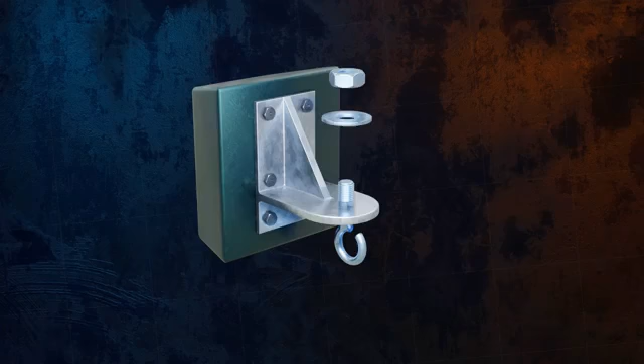We know that when we apply loads to an object, like this bracket, if we keep increasing the magnitude of the load, at some point the material will fail.

But how can we predict when static failure will occur? What level do the stresses in the object need to reach for it to fail?

First, we need to define what failure is. For ductile materials, failure is usually considered to occur at the onset of plastic deformation, and for brittle materials, it occurs at fracture. These points are easy to define for a uniaxial stress state, like a tensile test. They occur when the normal stress in the object reaches the yield strength of the material for ductile materials, and the ultimate strength for brittle materials.

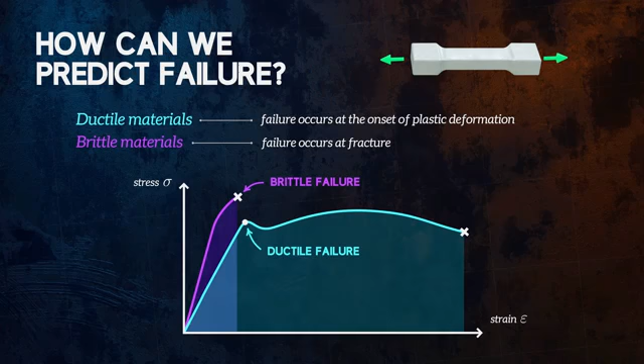But for a more complex case of triaxial stress, predicting failure is much less straightforward. In fact, it's so difficult to predict that we don't have one universally applicable method. Instead, we have to predict failure by selecting the most suitable one of a range of different failure theories, each of which we know works relatively well under certain circumstances, based on experimentation.

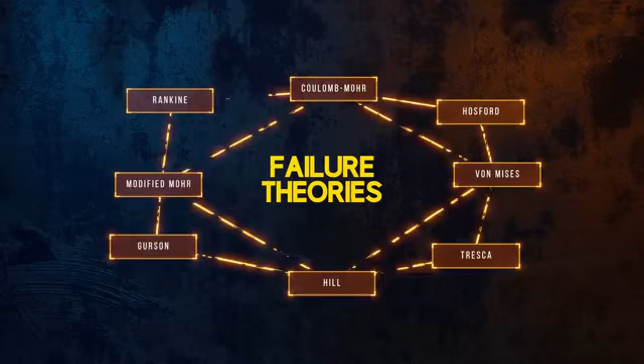Because they fail in fundamentally different ways, failure theories which apply for ductile materials usually aren't applicable for brittle materials, and vice versa. So what does a failure theory do?

It's quite simple. It allows us to predict failure of a material by comparing the stress state in the object we are assessing with material properties that are easy to determine, like the yield or ultimate strengths of the material that we can obtain by performing a uniaxial test.

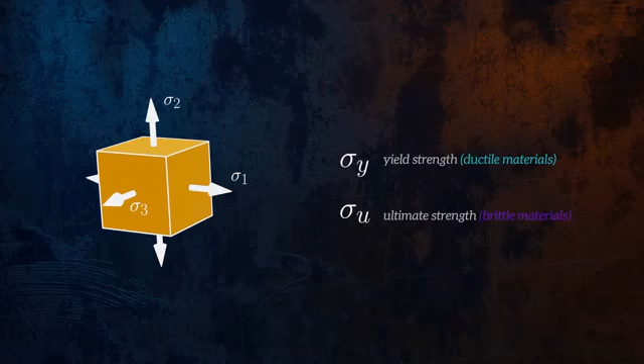The stress state at a point can be described using the three principal stresses. So most failure theories are defined as a function of the principal stresses and the material strength.

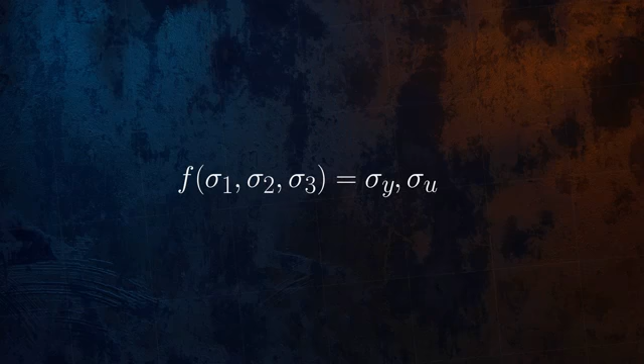Probably the simplest failure theory is to say that failure occurs when the maximum or minimum principal stresses reach the yield or ultimate strengths of the material. This is called maximum principal stress theory, or Rankine theory.

Although it's simple to apply, it's not actually a great failure theory, particularly for ductile materials, for reasons I'll explain later. Let's look at some better failure theories for ductile materials.

Any good failure theory needs to be consistent with experimental observations we can make about how materials fail. There is one key observation that failure theories for ductile materials need to capture, which is the fact that hydrostatic stresses do not cause yielding in ductile materials.

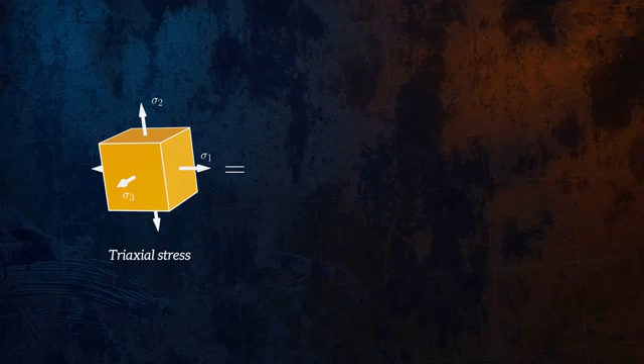Let me explain. A general triaxial stress state, like the one shown here, can be decomposed into stresses which cause a change in volume and stresses which cause shape distortion.

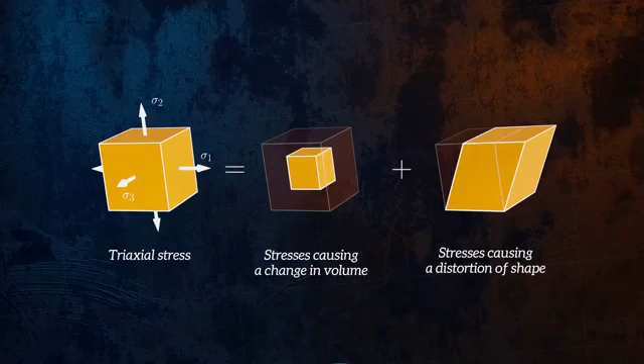Stresses that cause a change in volume are called hydrostatic stresses, because that is the type of stress acting on an object submerged in liquid.

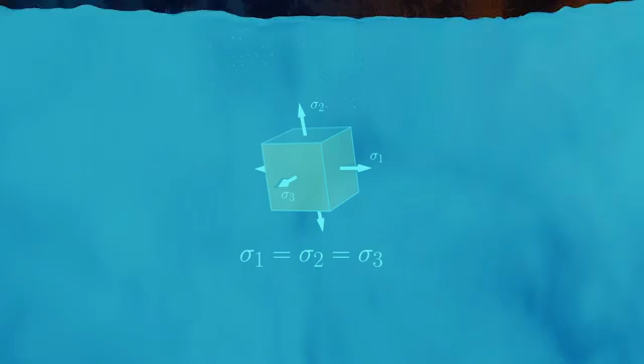For a hydrostatic stress configuration, the three principal stresses are always equal, and there are no shear stresses. For a triaxial stress state, we can calculate the hydrostatic component as the average of the three principal stresses.

The mechanism that causes yielding of ductile materials is shear deformation. Since there are no shear stresses for a state of hydrostatic stress, this component can be very large and still not contribute to yielding. Yielding is only caused by the stresses which cause shape distortion.

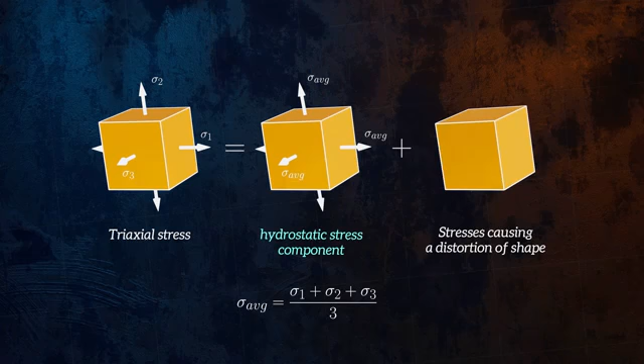These are called deviatoric stresses. The deviatoric component is calculated by subtracting the hydrostatic component from each of the principal stresses.

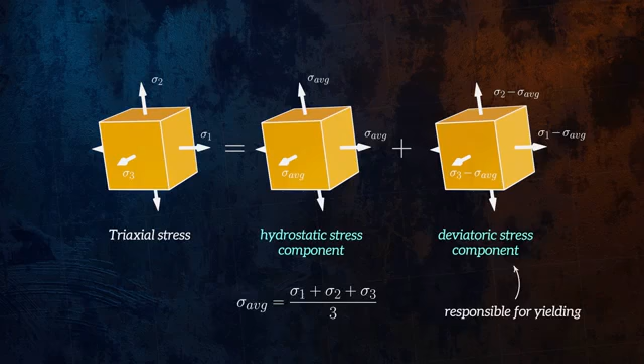The hydrostatic and deviatoric components can be expressed in matrix form, like this. Here we have described the stress state using the principal stresses, but we could also describe it for an arbitrary orientation of the stress element.

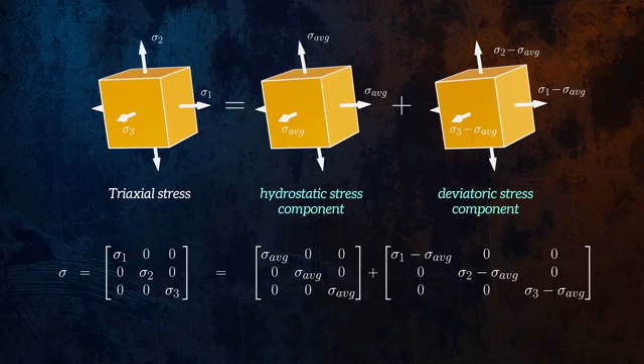It can be helpful to use Mohr's circle to understand the hydrostatic and deviatoric components of a triaxial stress state. For a hydrostatic stress configuration, there are no shear stresses, and so Mohr's circle reduces to a single point, equal to the average of the three principal stresses.

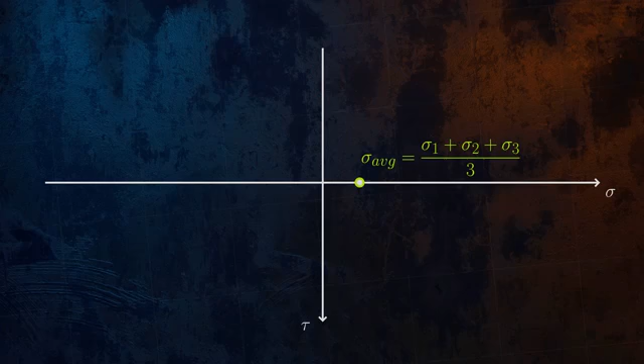Shifting Mohr's circle horizontally represents an increase in the hydrostatic component. And increasing the radius of Mohr's circle without changing the average stress represents an increase in the deviatoric component.

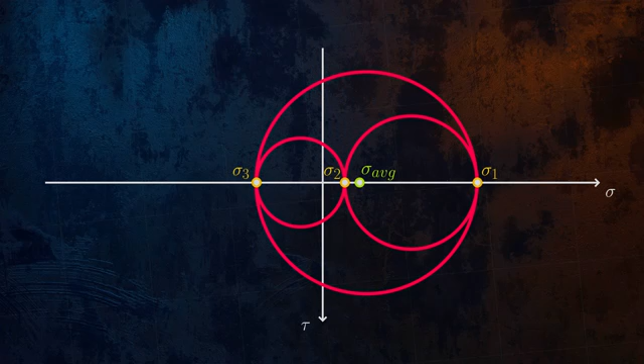Since failure of ductile materials only depends on the deviatoric component, a good failure theory for ductile materials should produce the same result regardless of where Mohr's circle is located on the horizontal axis.

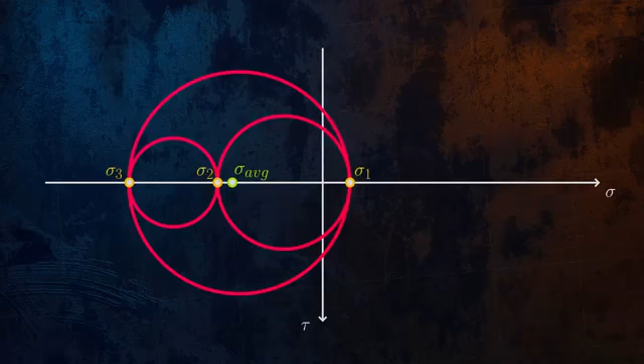This explains why maximum principal stress theory is not a good failure theory for ductile materials. It isn't consistent with the observation that yielding is independent of hydrostatic stress.

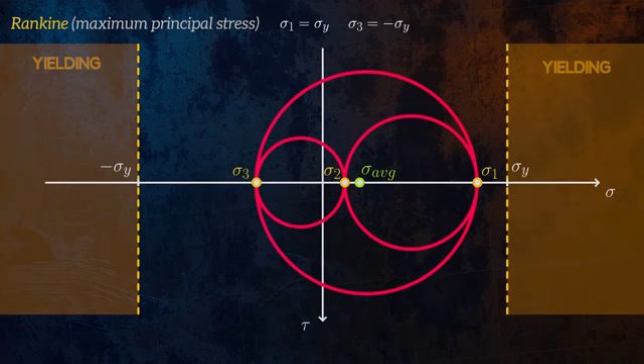Two failure theories which are consistent with this observation are the Tresca and von Mises failure criteria. These are the two most commonly used failure theories for ductile materials.

Let's start with the Tresca failure criterion, also called the maximum shear stress theory. It is named after the French engineer Henri Tresca, and it states that yielding occurs when the maximum shear stress is equal to the shear stress at yielding in a tensile test. This can be defined mathematically, like this, and graphically using Mohr's circle, like this.

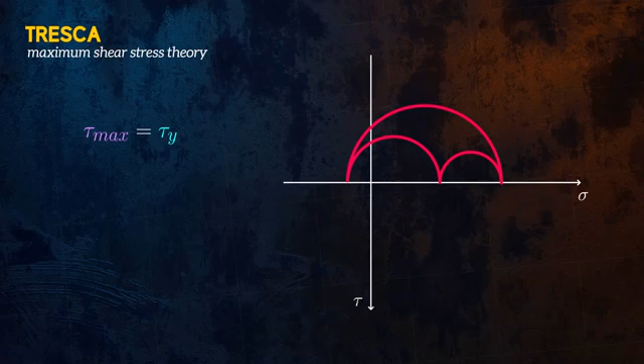This theory is consistent with the observation that hydrostatic stresses don't affect yield. It doesn't care where Mohr's circle is located on the horizontal axis.

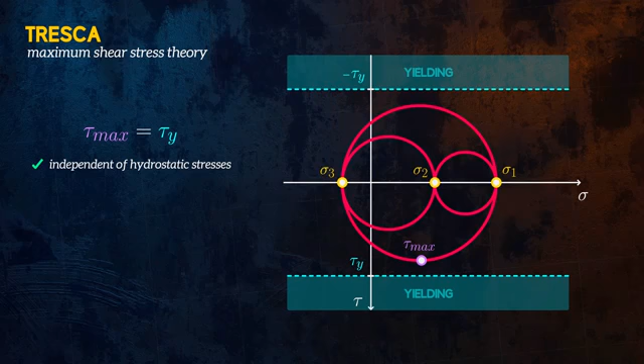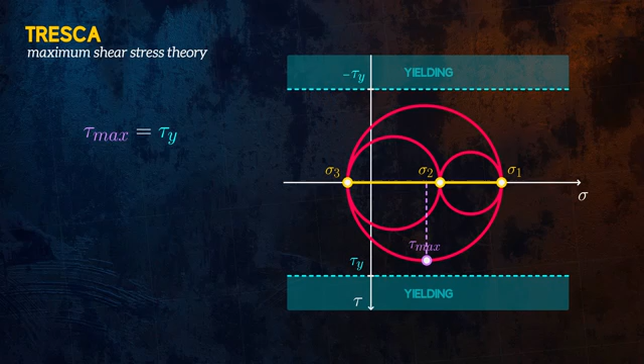It's common to express this theory as a function of the principal stresses instead of as a function of the shear stresses. We can see, based on Mohr's circle for a triaxial stress state, that the maximum shear stress is equal to the radius of the outer circle, which is the difference between the maximum and minimum principal stresses, divided by 2. Mohr's circle for a uniaxial tensile test at yielding looks like this.

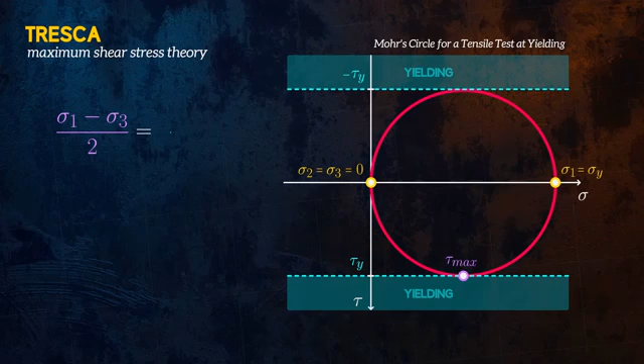The intermediate and minimum principal stresses, sigma 2 and sigma 3, are equal to 0, and the maximum principal stress, sigma 1, is equal to the yield strength of the material. The shear stress at yielding is equal to half of the yield strength of the material, so we can rewrite our equation to obtain the standard formulation for the Tresca theory.

Let's look at the von Mises failure criterion next, also called the maximum distortion energy theory. It was initially developed by the Austrian scientist Richard von Mises, but a number of others were involved in refining it, so it is sometimes called the Maxwell-Huber-Hencky-von Mises theory.

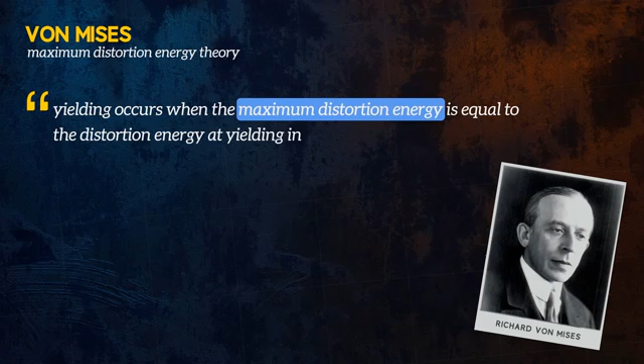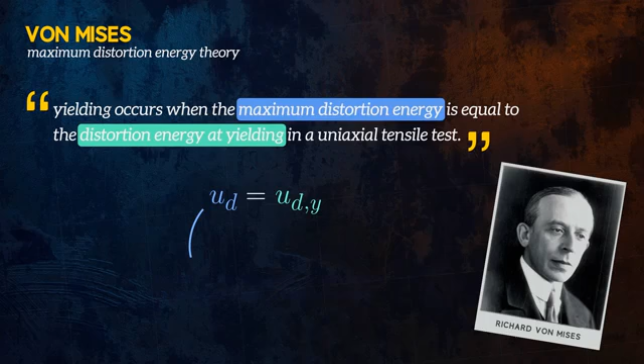It states that yielding occurs when the maximum distortion energy in a material is equal to the distortion energy at yielding in a uniaxial tensile test. So what is the distortion energy? It is essentially the portion of strain energy in a stressed element corresponding to the effect of the deviatoric stresses.

The distortion energy per unit volume can be calculated from the principal stresses using this equation. We know that at yielding during a tensile test, the maximum principal stress is equal to the yield strength of the material, and the two other principal stresses are equal to 0. So we can calculate the distortion energy at yielding in a tensile test by plugging in the appropriate principal stress values.

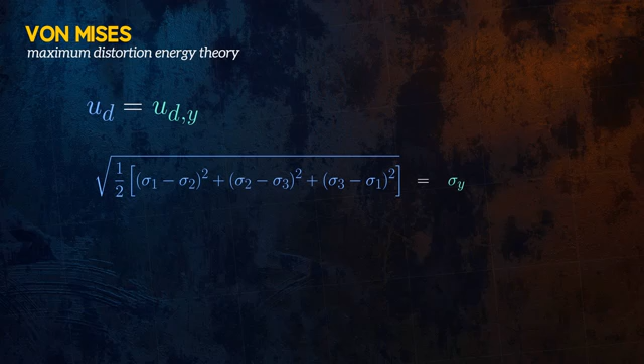By equating the distortion energy at yielding with the general equation for a triaxial stress state and rearranging a bit, we get an equation that defines the von Mises failure criterion. Again, we can see that this theory considers the difference between principal stresses and so is independent of the hydrostatic stress. The term on the left is often called the equivalent von Mises stress. If it is larger than the yield strength of the material, yielding is predicted to have occurred.

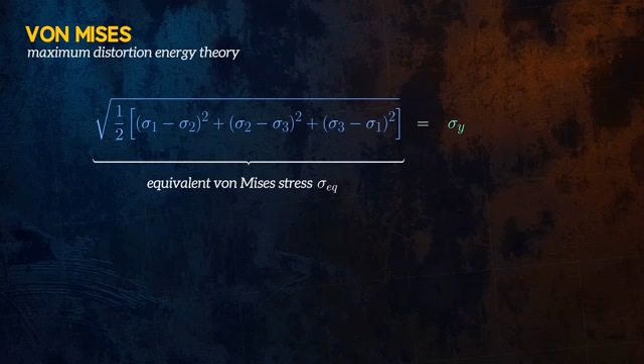The equivalent von Mises stress is a common output from stress analysis performed using the finite element method. Contour plots are typically generated to show the distribution of the von Mises equivalent stress within a component, as these allow areas at risk of yielding to be identified.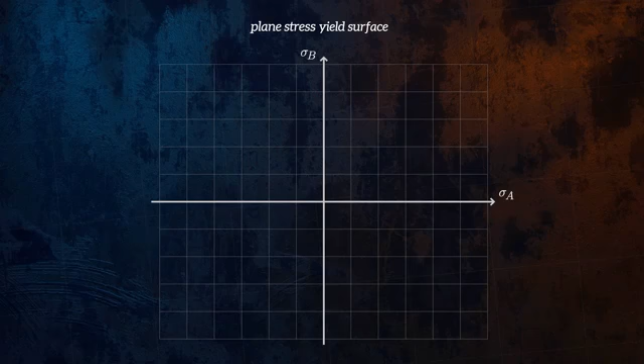The yield surface for the maximum principal stress theory is easy to plot. It says that yielding begins when either of these principal stresses is equal to the yield strength of the material, so it looks like this. Yielding is considered to have occurred when the stress state reaches this line.

Next, let's plot the yield surface for the Tresca theory. This theory states that yielding occurs when the difference between the maximum and minimum principal stresses is equal to the yield strength of the material.

But it's not as simple as taking the difference between sigma A and sigma B. Plane stress is still a three-dimensional stress state.

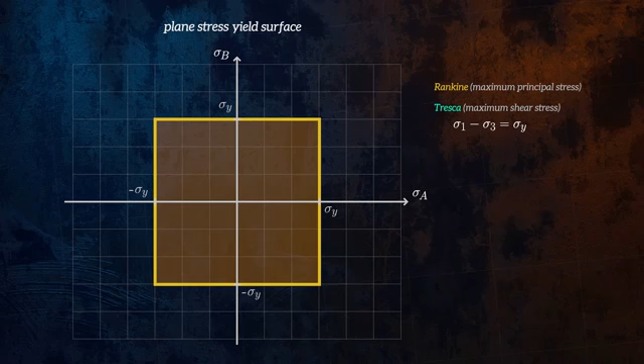In the top right quadrant of the graph, both sigma A and sigma B are positive, and so sigma C, which is equal to 0, is the minimum principal stress. The yield surface looks like this.

But in the bottom right quadrant, sigma B is negative, and so sigma B is the minimum principal stress. That gives us a yield surface that looks like this. Repeating this process for the other two quadrants completes the Tresca yield surface.

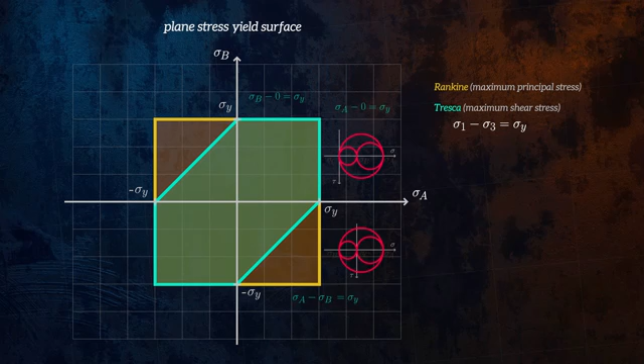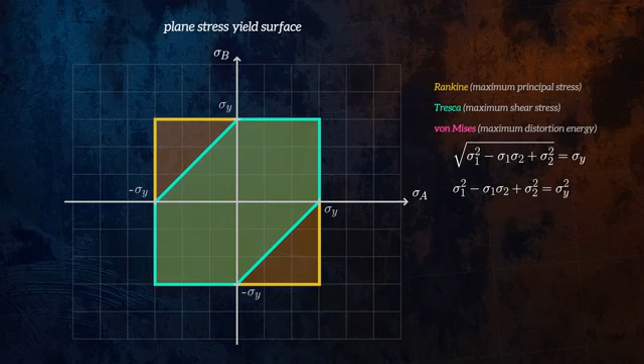Von Mises' yield theory for plane stress conditions is defined using this equation when expressed in terms of the principal stresses. We can square both sides of the equation and see that it is of the same form as an ellipse, which gives us the von Mises yield surface.

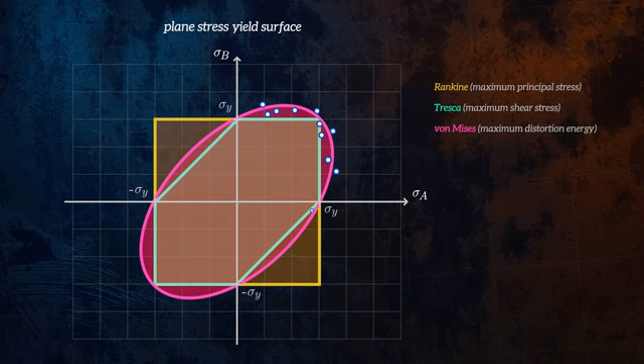Let's plot some experimental data for tests performed on ductile materials and see how each of these theories compares. It's clear that the maximum principal stress theory has large areas where its use is potentially unsafe. So let's get rid of it and compare Tresca and von Mises.

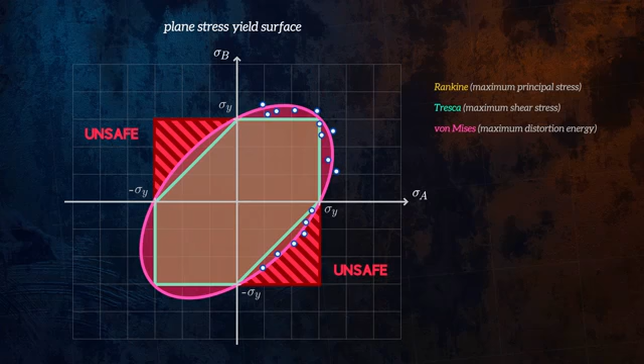Both agree well with experimental observations, although von Mises agrees slightly better. The Tresca yield surface lies entirely inside the von Mises surface, meaning that Tresca is more conservative.

If we assume that the principal stresses will increase in proportion to one another as a load is applied, so the stress paths are straight lines, the difference between the Tresca and von Mises theories is largest for these six configurations. The maximum difference between the two theories can be calculated to be 15.5%.

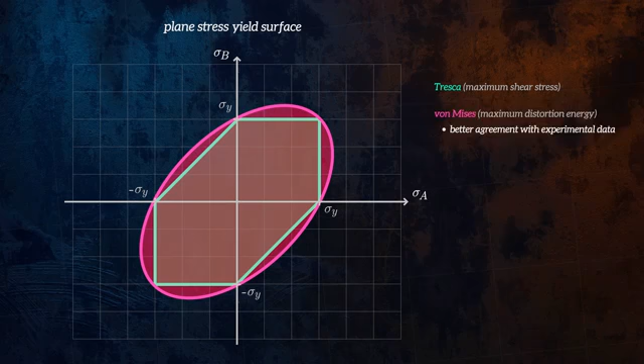Von Mises is usually preferred to Tresca because it agrees better with experimental data, but Tresca is sometimes used because it is easier to apply and it is more conservative.

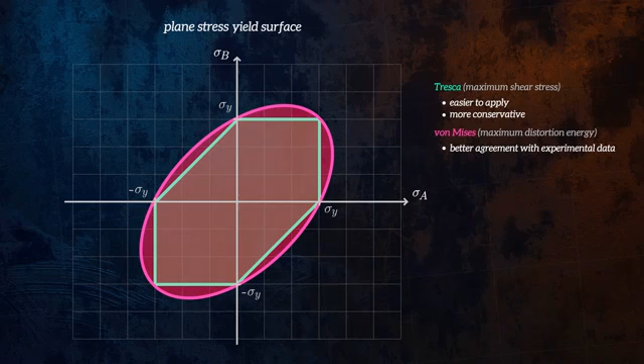So far, we have looked at a plane stress case, with sigma c equal to 0, but for a general three-dimensional stress state, sigma c will be non-zero.

We know that the Tresca and von Mises yield surfaces aren't affected by hydrostatic stresses, and so to obtain the yield surfaces in 3 dimensions, we just need to extend the plane stress yield surfaces along the hydrostatic axis.

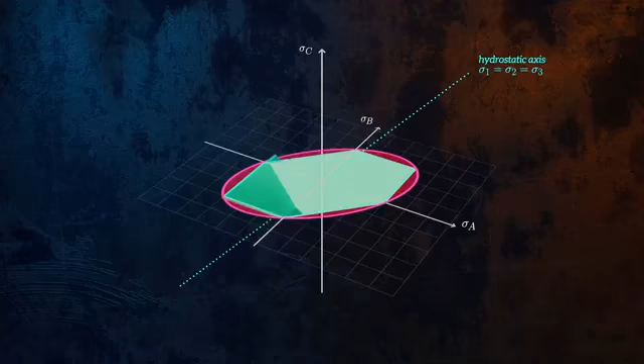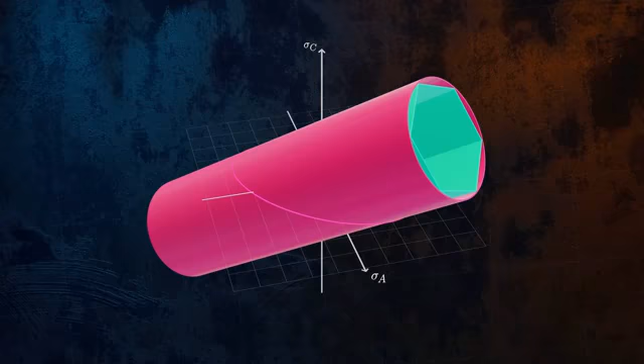Failure of brittle materials is different to failure of ductile materials. For brittle materials, failure is considered to occur by fracture rather than yielding. And unlike ductile materials, brittle materials tend to have compressive strengths that are much larger than their tensile strengths.

This needs to be captured in any failure theory for brittle materials. It also means that to assess failure of brittle materials, we need to know 2 separate ultimate strengths, for tension and for compression.

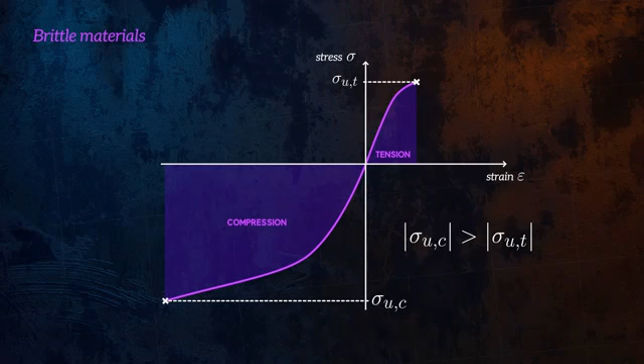Coulomb-Mohr theory is a failure theory often used for brittle materials. Unlike the theories we have seen for ductile materials, it considers failure to be sensitive to hydrostatic stresses and captures the difference between tensile and compressive ultimate strengths.

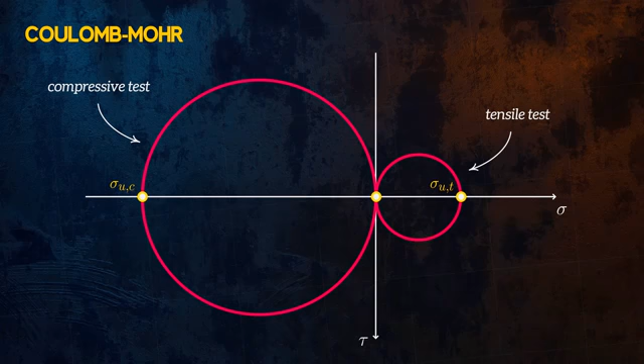The easiest way to define this theory is using Mohr's circle. We start by drawing the Mohr's circles corresponding to failure in the uniaxial tensile and compressive tests. By drawing lines tangent to both circles, we create a failure envelope.

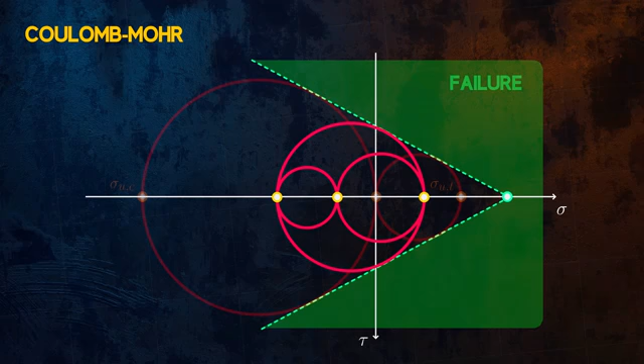Coulomb-Mohr theory states that a material will fail for a stress state with a Mohr's circle that reaches this envelope. The Tresca yield criterion we saw earlier is actually a special case of the Coulomb-Mohr failure theory, where we have the same material properties in tension and in compression.

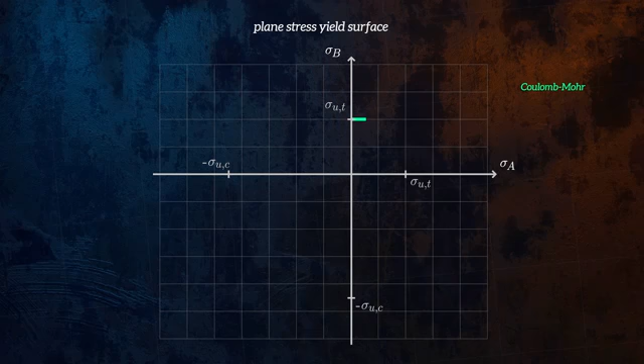The plane stress failure surface for Coulomb-Mohr theory looks like this. As you can see, it doesn't agree particularly well with experimental data in the bottom right quadrant.

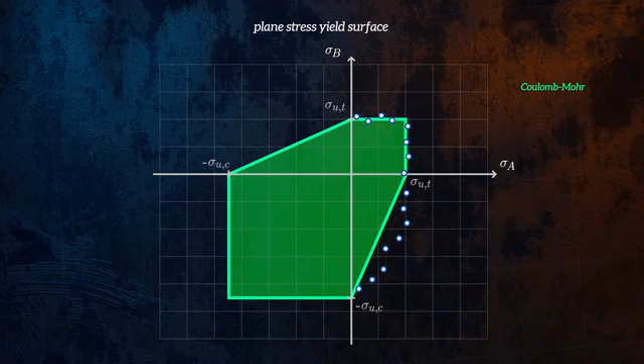Modified Mohr theory is a slight variation on the theory which better fits experimental data. It is one of the preferred general failure theories for brittle materials.

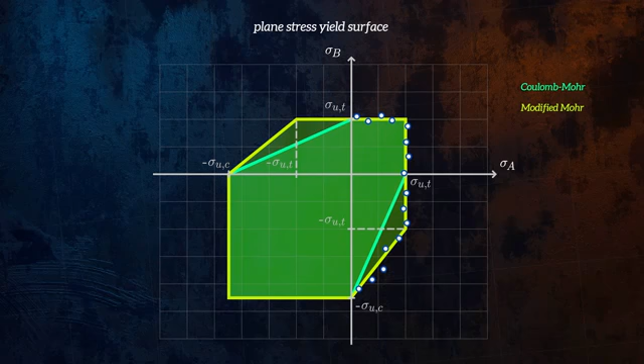Because failure theories for brittle materials need to account for the effect of hydrostatic stresses, these failure theories converge to a point when extended along the hydrostatic axis.

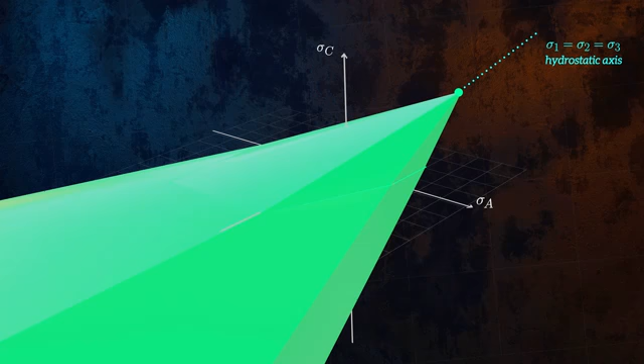And that's it for this introduction to failure theories. We've covered the most common theories, but there are many more out there which may be more appropriate for specific scenarios.